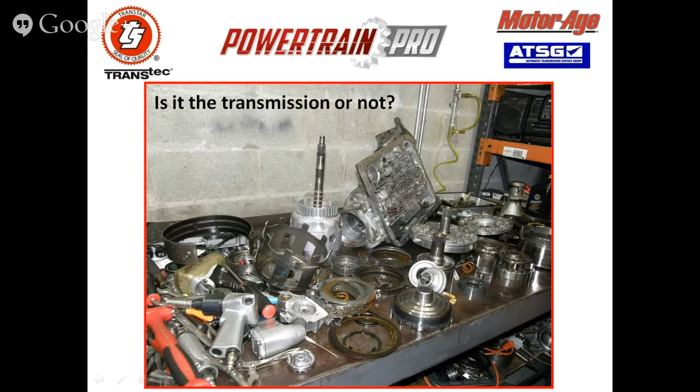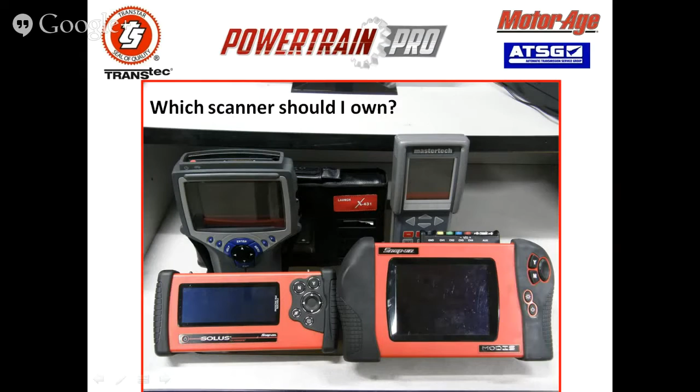One of the most widely asked questions I hear when it comes to transmission diagnostics is, is it the transmission or not? The second most widely asked question is, which scanner should I own? Neither of these simple questions have a short, simple answer. One response I have is that the question you should really be asking yourself is, what type of scope should you own? Because you will definitely nail down more issues with a scope than you will with a scan tool.

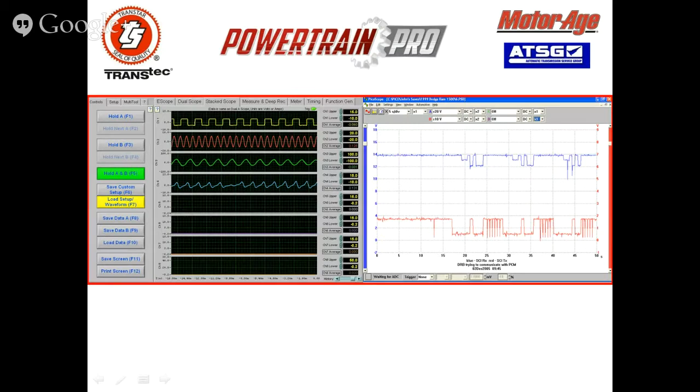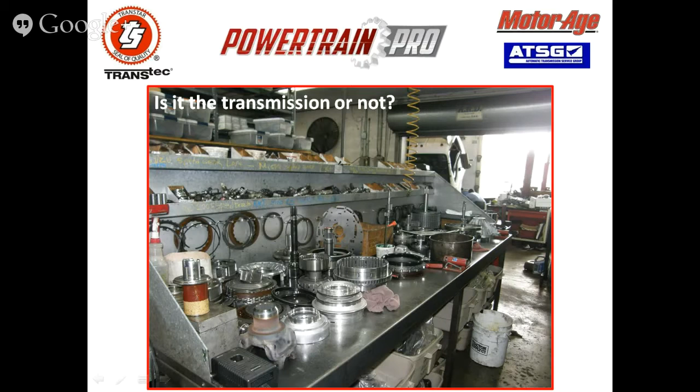But when a transmission is malfunctioning, a legitimate starting point is to ask, is it the transmission or not? After that, a diagnostic approach to a particular problem can vary depending on a number of factors.

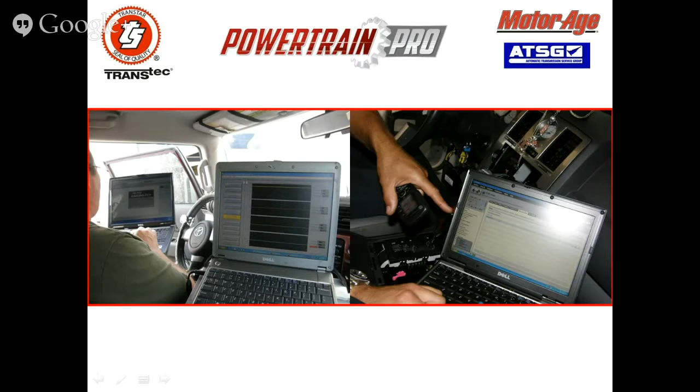Some of the major contributing factors that could shape a diagnostic approach would be the year and make of the vehicle, the level of expertise of the tech, and the type of equipment available for use. The year and make of the vehicle not only determines the type of transmission being diagnosed, but also determines the operating system of the vehicle it works within.

For example, is the ABS the primary source of vehicle speed being broadcasted over the network? Or is it a Hall effect or AC voltage generator located in the differential, the transfer case, or transmission? Does it have a mechanical TPS or drive-by-wire? Is there a dedicated TCM, or is it integrated into a PCM?

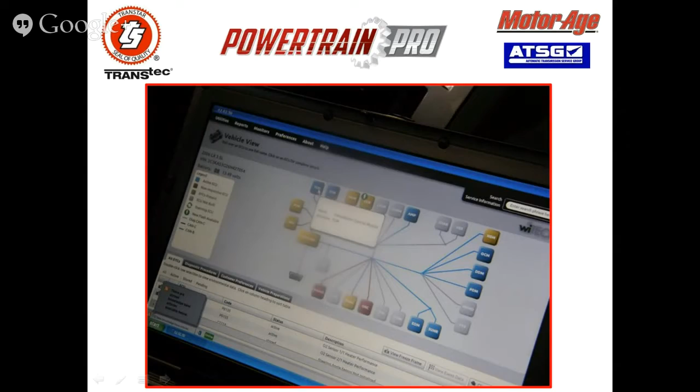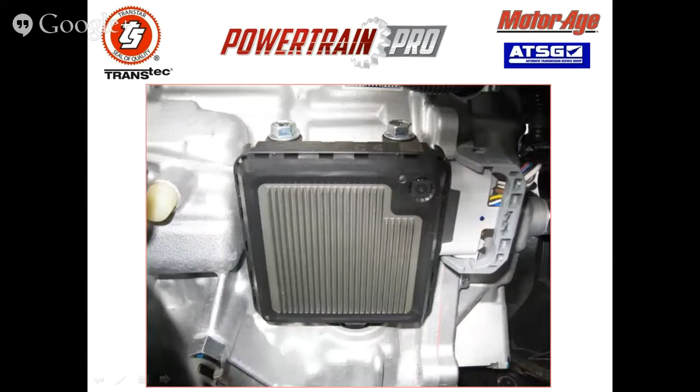The transmission itself could have the computer built into the transmission, like a mechatronic assembly or a TECM, or it could be bolted directly on the transmission, like the Toyota U660 or the Ford TF81SC, or it could be remotely located somewhere in the vehicle.

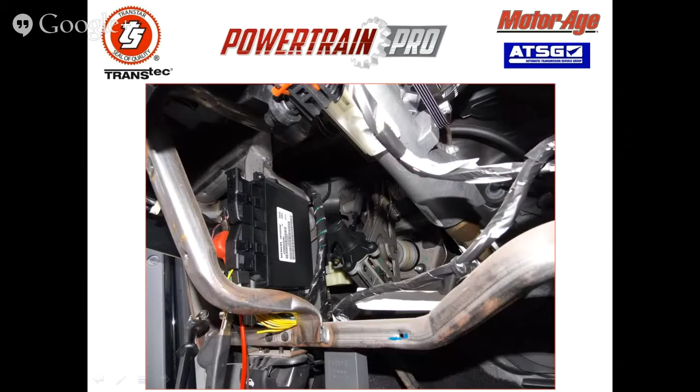Just this factor alone changes how one would approach a solenoid electrical fault. This was just a simple example of how a diagnostic approach can change based on the type of transmission and the operating system it works within. The various differences are considerable.

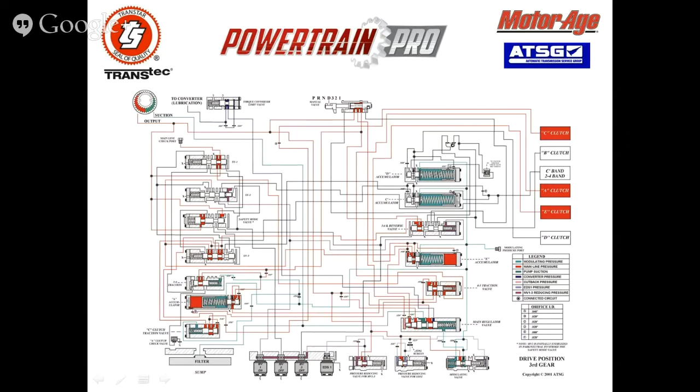But then there comes into play the level of expertise of the tech. Does he or she know how to read hydraulics and wiring diagrams? And can they interpret pressure gauge readings? I think if you can interpret this one, you're pretty good.

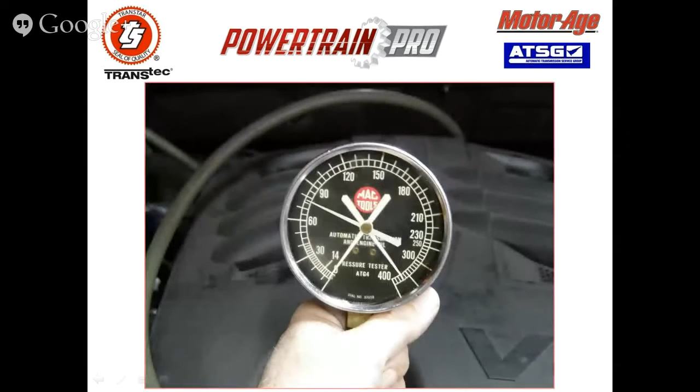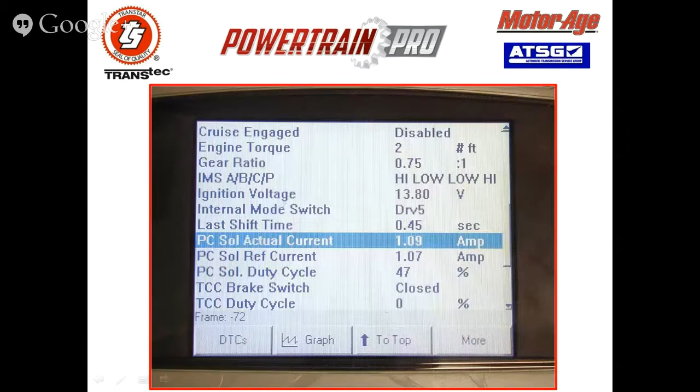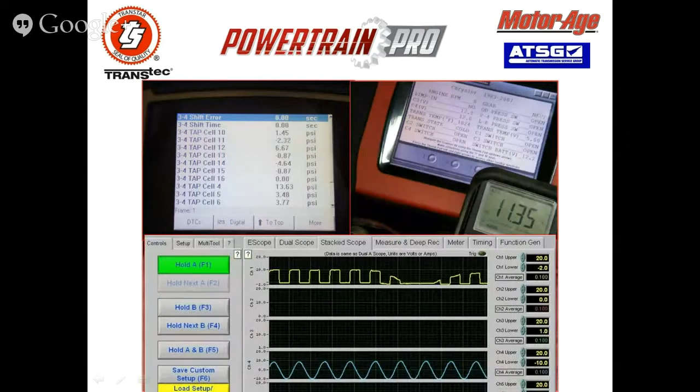Can they record movies with the scan tool perhaps, and then be able to interpret that scan tool data? Can the tech operate scopes and meters effectively? Is there a comprehensive understanding of various sensors, inputs, and computer command outputs? Is there a comprehensive understanding of solenoid to planetary power flow?

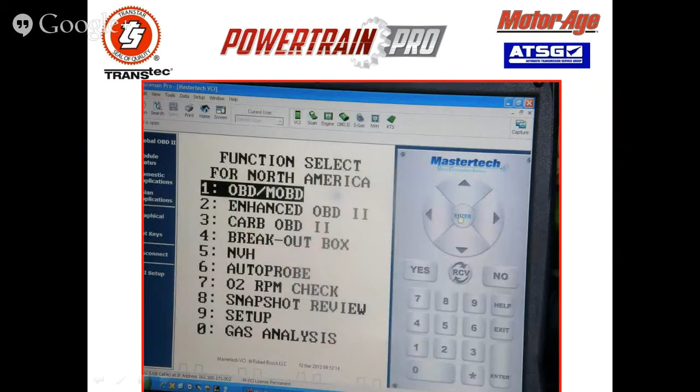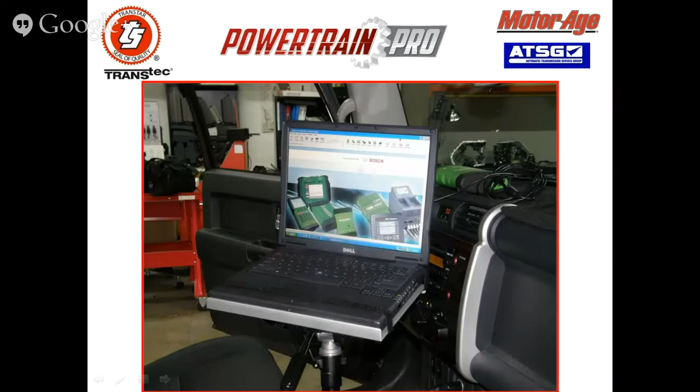The level of expertise of an individual determines the optimal use of the diagnostic equipment that's on hand in the shop. I've seen the extreme where a shop has a variety of scanners, meters, and scopes, and no one knows how to use them beyond pulling codes. Yet on the other hand, there is an extremely capable individual in the shop but lacks the equipment to do their best.

But with all this in mind, one can completely understand how difficult it is to answer, is it the transmission or not? However, in light of these variables, there are general tips in diagnosing problems that can be utilized in a wide variety of cases, which is the intent of this seminar.

These general tips that I'm going to offer up have been developed over the years from working on the technical helpline here at ATSG. These tips will cover the most common questions to ask the customer, to tips about trouble codes. We're going to have several points throughout the presentation about trouble codes.

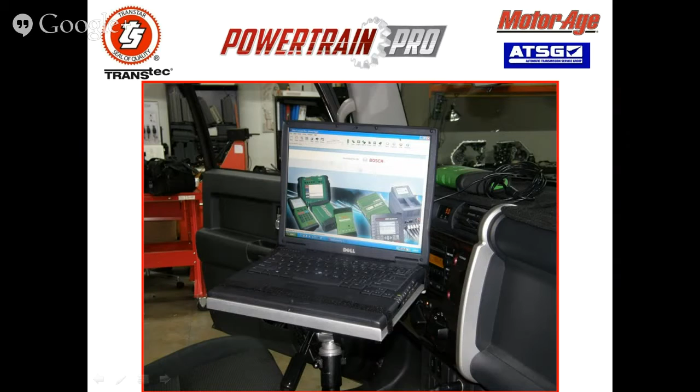The importance of power and grounds, obviously, wiring and electrical devices, and what to do with the lack of scan tool data. And then some sensor signal tips.

But first of all, we'll start by briefly running through a typical checklist so that it can be contrasted with what I call the not-the-typical checklist.

I cannot emphasize enough, from doing tech calls, the amount of headaches that can be avoided if the right questions were asked. The not-the-typical checklist was developed from experiences we've had with the tech line. Hindsight is always 20/20 vision, so the intent is to have foresight with this kind of list.

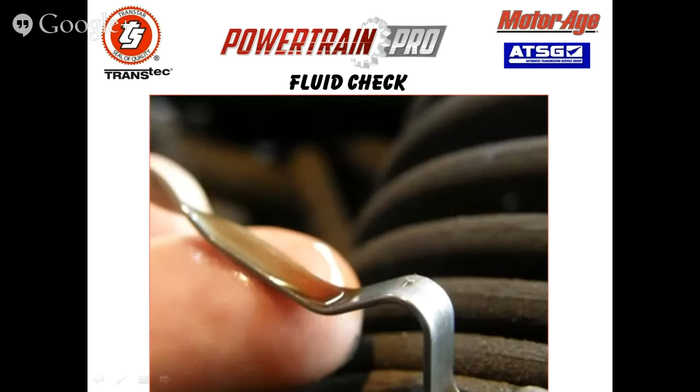A typical checklist usually begins with acquiring customer and vehicle information, and asking the driver what the complaint is, followed by when they began to notice the problem. Usually at this point, an inspection is made of the fluid level and its condition. Pulling codes may be next, and we'll get into codes a little later on.

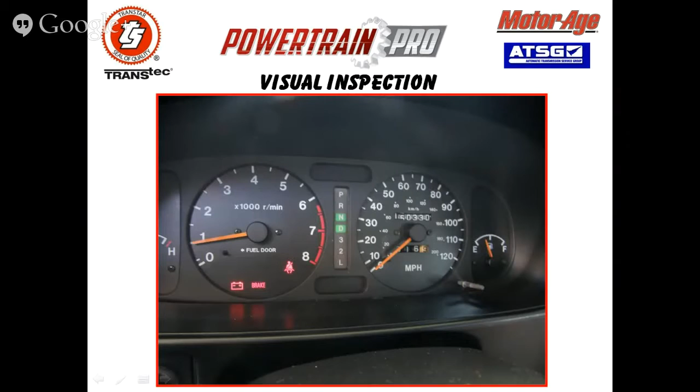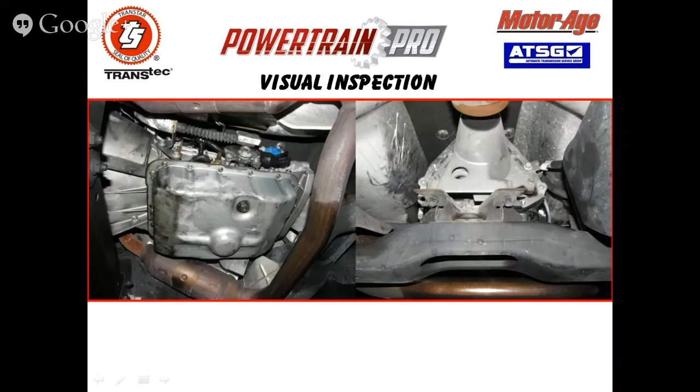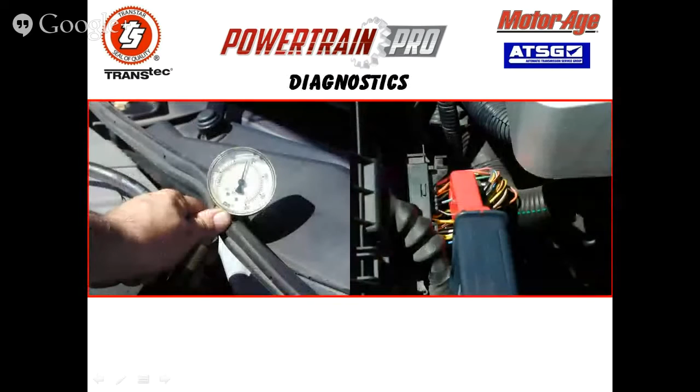And of course we check for leaks, bad mounts, U-joints. We might be looking for linkage issues. And after all this, there may still be a need to do some pressure testing, electrical testing, maybe even bulletin investigations before it can actually be determined if the transmission needs to come out or not.

But now let's run through the not-the-typical checklist, which I think is really going to be helpful if you don't already have some of these questions in mind.

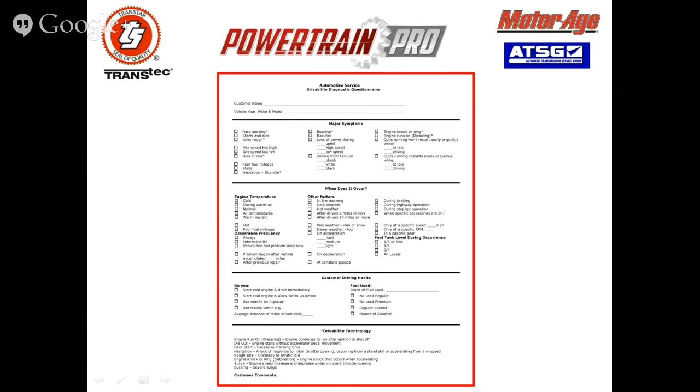The very first thing is to ask the customer if the vehicle has had an aftermarket tuning program or chip installed into the computer, or if it had recent programming done at the dealer.

We had, for example, a shop out in Everson, Washington, where a Dodge diesel with an incomplete chassis using the Aisin-Seiki 68RC transmission came into the shop. It was totally destroyed. After rebuilding, the transmission had sloppy shifts.

And of course the tech tried to have a factory scan tool reset the shift adapts, but they would not reset - they were frozen. He was about ready to buy a new TCM.

But when he called the owner to discuss the possibility of a new computer, all of a sudden the owner started to say, you know, I installed this tuner program into the computer through the ALDL, and after I did it, it shifted great, but over time it really disintegrated. Well, so did the transmission.

But the tool used to install the tuner could also remove the program. And when they did, the adapts could be reset, and the transmission shifted perfectly.

Now, could you imagine the shop owner buying a new TCM? Of course everything would work well. And what do you think the owner would do once he got his truck back? Install the tuner back into the computer, which would lock the adapts and burn the transmission out while it was under warranty.

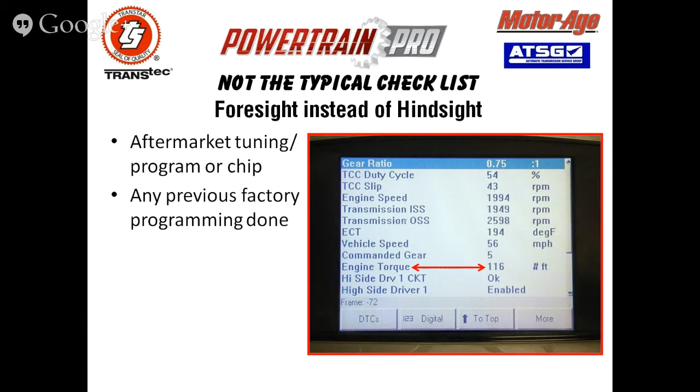Now, one tip to see if any alterations were made to engine performance would be to compare the engine torque PID in a scan tool, like you see here, to factory specifications. Because engine torque is a combination - it's an engine load calculation based on TPS and mass airflow. It's great for identifying non-OE calibrations.

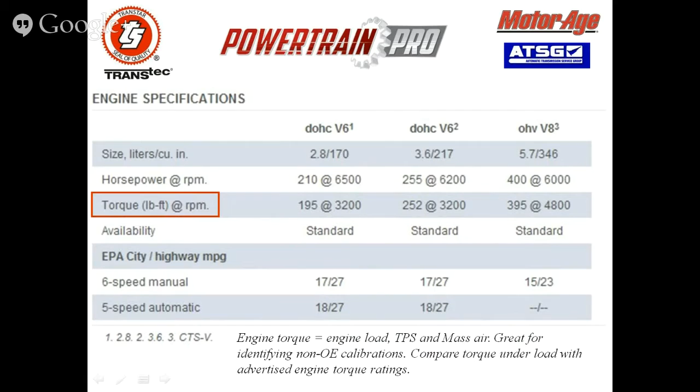If you compare the torque under load with advertised engine torque ratings, and if they don't match, well, either there might have been some programming done, or maybe you do have some engine load problems. So at least you have a clue that something is wrong.

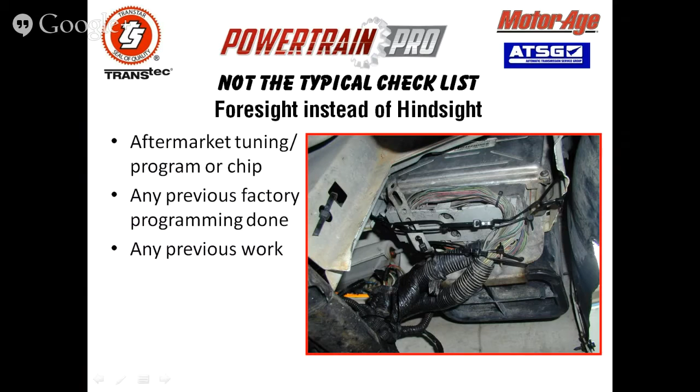Another question to ask, of course, is whether any previous work was done on the vehicle, and I mean any kind of work, not just transmission. Maybe engine, under the hood stuff, brakes, ABS, but especially collision repair. There are so many times we've had work done in a collision shop that has hidden problems with electrical wiring. So if you have a clue as to where the work was performed, you could get pointed in the right direction. Now, here's something that's very good to do.

Always check tire sizes. Make sure you have correct tire size, and I suggest using a stagger gauge. It's so quick and easy to do, and you can ensure that all the tires are of equal size within 1/8 inch of each other, especially with 4x4s and all-wheel drives. When you have the wrong tire size, that transfer case becomes overactive, and you have premature failure of the transfer case.

We have quite a number of vehicles now that have that curve recognition program where, once you're in a turn, it does not want the transmission to shift. So if you've got tires that are overinflated, underinflated, maybe 3 worn tires and 1 good spare, the computer will initiate a curve recognition program as you're going down the road straight, and the heavier you are in the throttle, the less it will upshift. So really, tire sizes are critical.

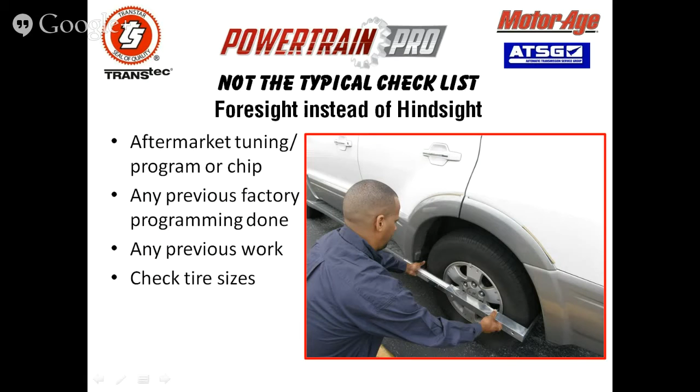And now, of course, you should also ask the customer, was it in a flood? I know that sounds kind of ridiculous, but keep in mind, customers do not like telling you the whole story in fear of a higher repair bill. So you really got to try to work these things out of them.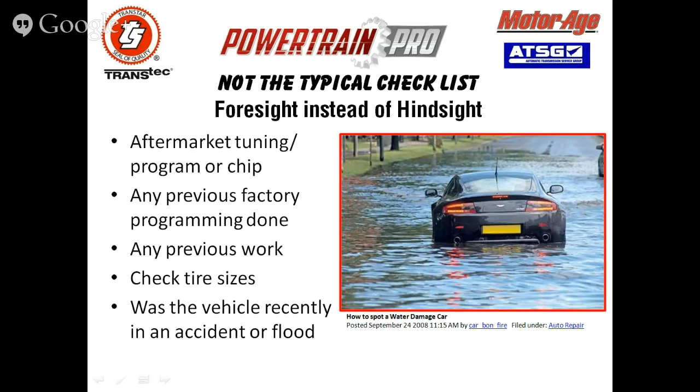Also ask if there was any aftermarket gadgets recently added, especially because they could have done something that's completely hidden and out of view. And again, these are questions that, had shops known this before doing the work, could have saved them enormous amounts of headaches.

Fluid changes, additives, gasoline, just so many things. Like Honda, you've got to make sure you got OEM Honda fluid in that thing. Otherwise, Hondas are going to have very abrupt shifts.

Engine oil—take a 2.4 liter Chevy Cobalt with variable valve timing. It'll sport a P0010 code or a P0011 code for a camshaft position actuator solenoid system performance. And these codes will absolutely cause high line pressure, making harsh shifts inside the transmission.

I had a situation here in Miami at Alonzo Transmission where it was a BMW 7 Series. The vehicle came in, had to have some repairs done, and then they were calling us here at ATSG with a severe problem with the converter clutch. At least that's what they thought. It was so severe that it actually felt like somebody was inside that transmission with a sledgehammer beating it up against the flywheel.

And of course, I went there, and I got to tell you, it was remarkable. While idling in park, the banging that was going on was so dramatic that the steering wheel was actually vibrating. What it turned out to be was that when the car came to the shop, it came basically almost in fumes. So on a road test, they had to put gas in it, and they loaded it up with some cheap gas. That BMW 7 Series did not like it, and they were confused, thinking it was some kind of converter clutch issue.

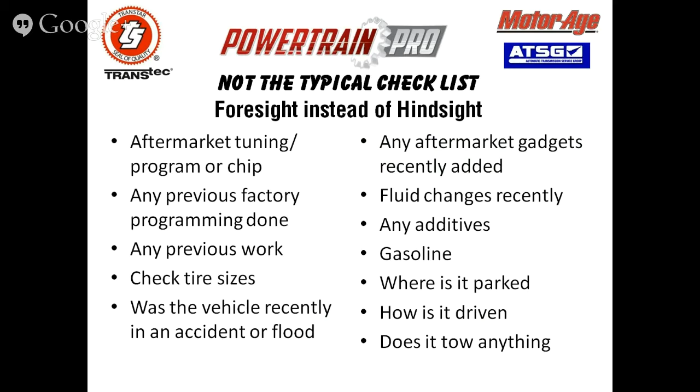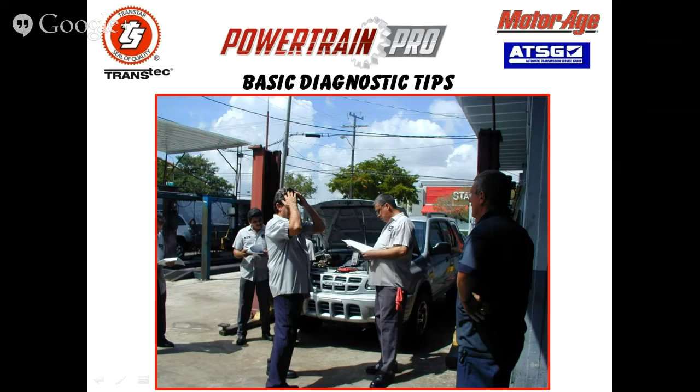So sometimes asking these questions can really pull out some answers that you might need to diagnose some of these problems. Oftentimes answers to these questions take place after the work has been completed and the real problem surfaces. So remember, hindsight is 20/20 - make it your foresight with some of these questions.

Now we talked about pulling codes earlier. By the way, you'll see a lot of pictures using the Genesis throughout this PowerPoint, and the reason for that is it's such an easy scan tool to take a picture of - the screen is big and it really helps with the presentation. So that's why you'll see that here.

But anyway, whether or not you're pulling codes, I do recommend you do a complete system health check and scan the entire system for codes. And the next step is to prioritize your codes - I call that learning how to diagnose your diagnostic codes.

I'm going to have a simple example right at the end of this presentation about that. I could probably do a whole webinar on diagnosing diagnostic codes and learning how to put them in priority - trying to see how one code may be caused by another, or how maybe there's something wrong with the transmission that caused those codes, which I'll explain shortly.

And of course it's good to write down all the codes to document them - I personally like to do that - and then erase them all, and drive the vehicle to see which ones return immediately. That helps me begin to prioritize what's going on with the vehicle.

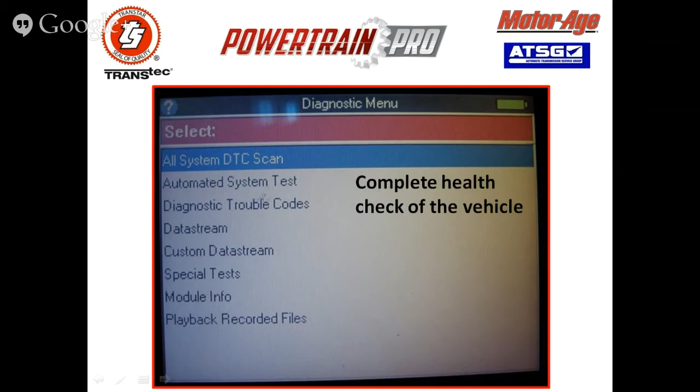Now this next point I just can't stress enough either. Battery testing only takes minutes to do, just like it would only take minutes for you to take a stagger gauge and measure tire sizes. To actually clean the battery and do a load test on it - you won't believe how many problems you will solve just by starting here with the battery.

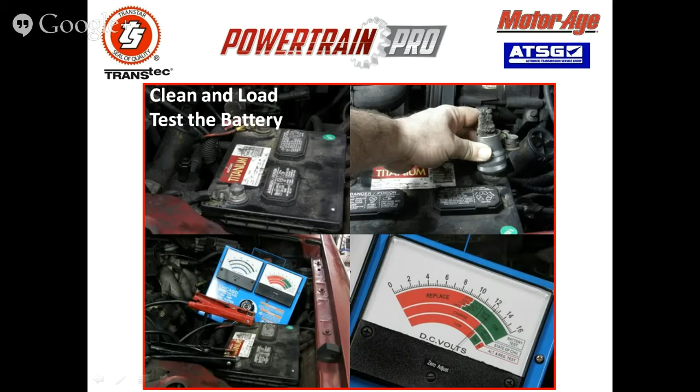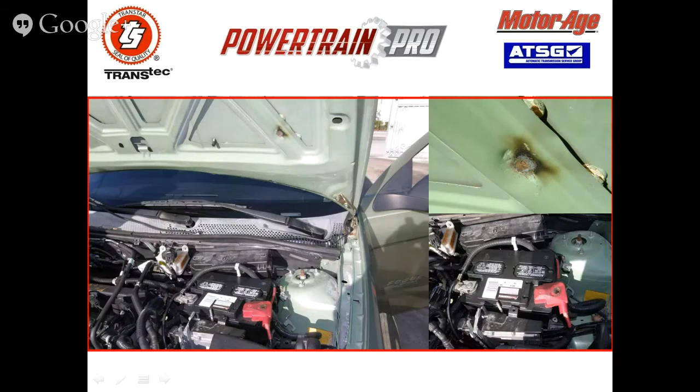But there are vehicles now that, because there's so many modules, batteries are important. There are even some vehicles using power modules to control optimized charging, the reduction of load or load deactivation, to name a few things they can do. They have fail-safe characteristics and data memory. So when a battery is replaced, the module will need to be informed that it has been.

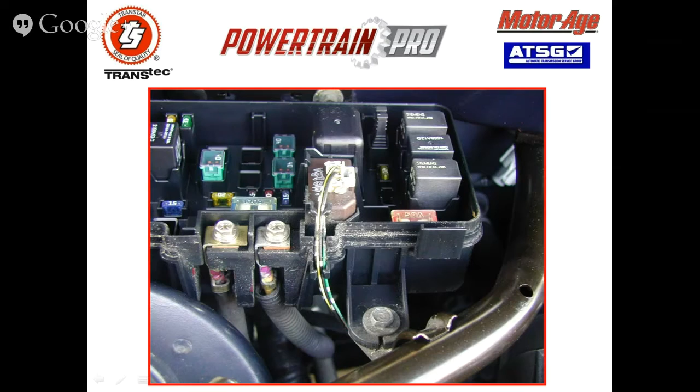Now another example of controlling the power in the system and how it can affect particularly transmission diagnostics: Honda with the electronic load detector, the ELD. When this thing goes bad - it obviously helps control voltage output on demand - you will get a host of solenoid electrical codes, and you'll never resolve them until you get that ELD squared away. So that's an example of trying to diagnose your diagnostic codes and putting codes in certain priorities. Don't ignore the ELD and try to fix all these solenoid electrical codes - get the ELD fixed first, get the electrical right, and then let's see if we've still got solenoid electrical codes.

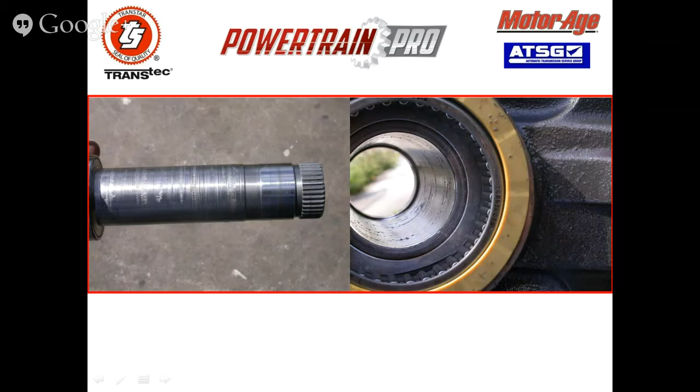It will try to find a ground path through different parts of the transmission. You can have these bushings that look like moon craters, little pockets of explosion, taking out different parts of the transmission because it's looking for a ground path.

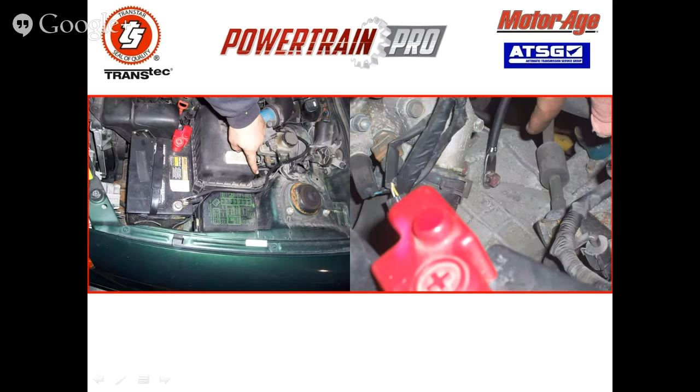Here's a scenario where this is like an Asian style setup where all the solenoids are grounded in the transmission through an eyelet and a bolt. So the computer is just hammering it with voltage, firing the solenoids with voltage. And the ground path from the transmission to the battery was compromised and continued to produce solenoid electrical codes. No matter what you did, we couldn't fix it. We actually ran a ground wire from the negative post of the battery right to the bell housing bolt to the transmission to ensure that we had a good ground, and all the solenoid codes went away.

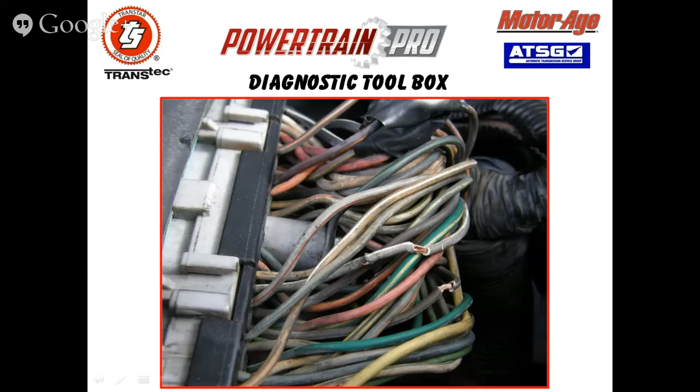So we can't underestimate power and grounds, batteries. Make sure we have the right battery. Just don't want to underestimate that. You know, much can be said by doing a cursory view of the electrical system.

So doing some inspections like this, when you have a lot of electrical codes, it's good to be aware that insulation does disintegrate, and to be doing that kind of visual inspection. Sometimes doing a visual inspection becomes quite obvious. You see something like this, you know why you've got some electrical problem.

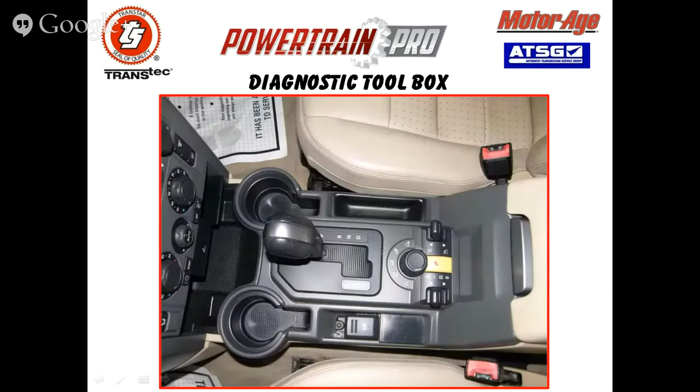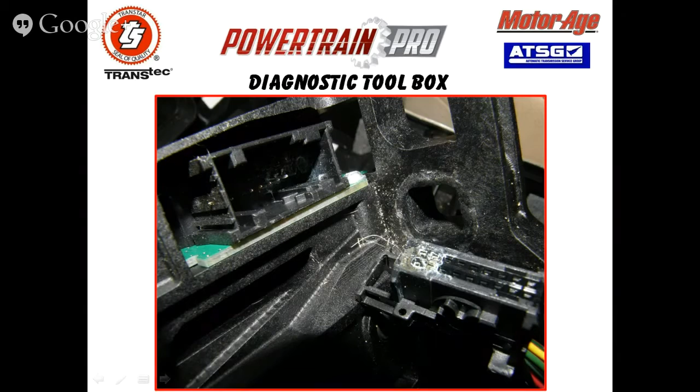Now, another area that you want to watch for are these center consoles. Center console with the shifters, a lot of them have little shifter computers in there. And of course, you've got sunroofs, coffee spills, soda spills. You've got all kinds of areas in which you can get water down in there and give us all kinds of problems, and you get water intrusion. I call it a little bit of broccoli growth going on in the connector, and gives you different things, and you got to be looking for things like this and keep that in mind.

Of course, some self-inflicted injuries, like laying down a pin, and you want to be looking for those things. Sometimes I hear, we didn't have this problem when it came in, and now all of a sudden we got all these electrical problems.

Well, you know, I've been in the shop since 1974. I've been really in the shop almost full time, and I've seen some pretty wild things in the transmission shop.

Sometimes the guy who's letting the transmission down on the jack starts talking to somebody next to him, or he's just looking away while the transmission's coming down, and all of a sudden I see the transmission start to lift up off the jack as it's being snagged on the wiring harness, and all of a sudden you're yanking wires.

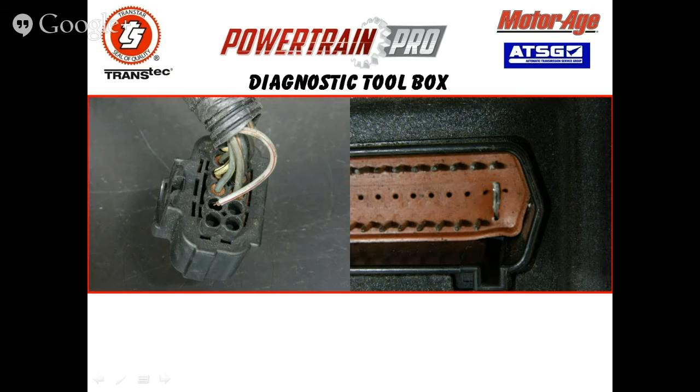So doing some visual inspection, looking for pins laying down, looking for wires that are broken in back of the connector. Very good to do things like that.

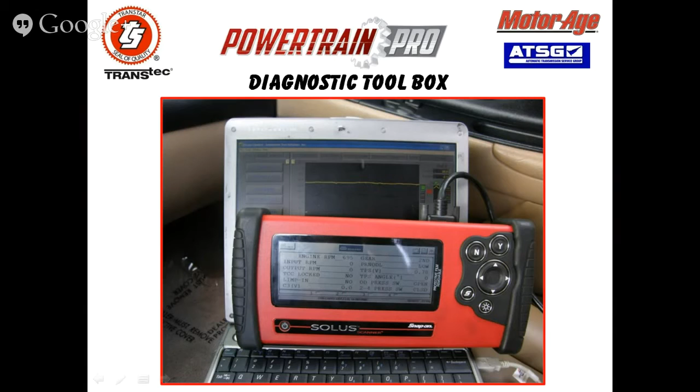Now, many times, getting into another tip here, aftermarket scan tools sometimes are very lacking for transmission diagnostics. And the transmission industry has always been the red-haired stepchild in this way. One of the main reasons is that scan tools cater to emissions control, especially when you've got 10,000 transmission shops and shrinking, while you have 110,000 general repair shops and growing. It's an obvious choice as to the type of data the scan tool companies want to load up the tool with.

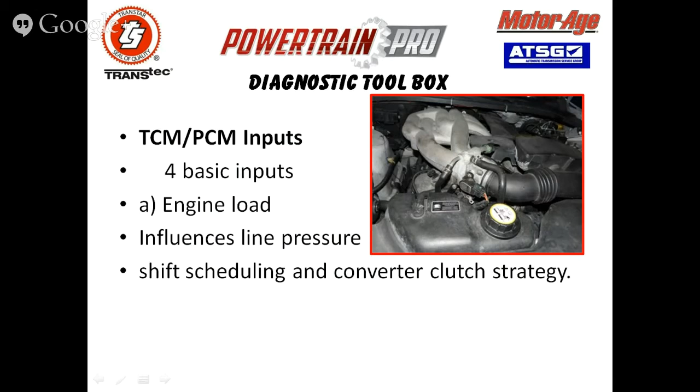But in these cases, when I'm diagnosing transmission issues with a scan tool that is not offering much in transmission data, I observe 4 main inputs, which typically can be found fairly consistently in scan tools. The first one, of course, is engine load. We're talking TPS, mass air, anything related to engine load, because it influences line pressure, shift scheduling, converter clutch strategy. So that's one thing I'm concentrating on. The next thing is speed sensors.

Obviously, speed sensors of any sort, whether it's engine speed sensors, input shaft speed sensors, or output shaft speed sensors, I'll take whatever's available. Because speed sensors have a tremendous effect on shift scheduling and converter clutch control, but they can also be used to check gear ratio of the transmission, which helps with shift overlap, where we're releasing one clutch and putting on another, and that timing has to be right. Gear ratios are all determined by speed sensors, a very important input.

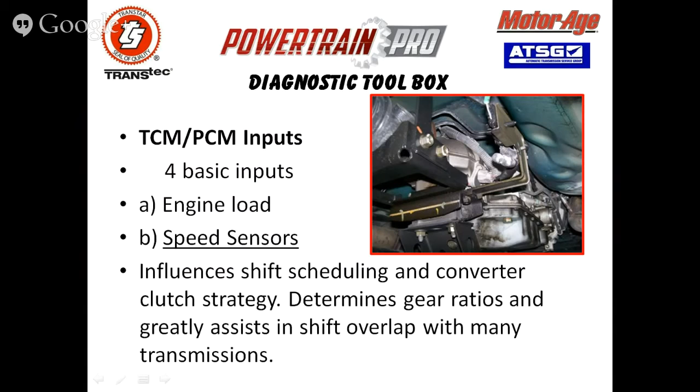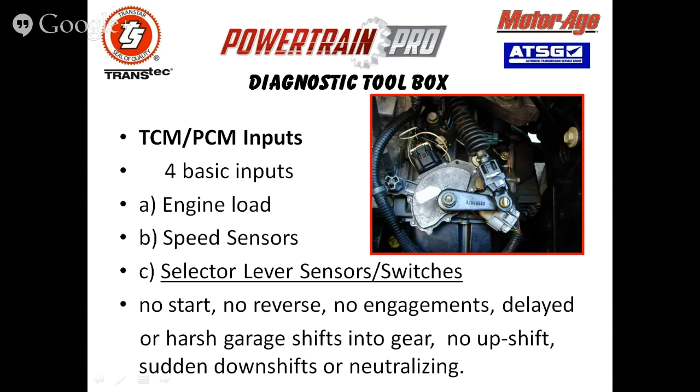The third input that I'm concerned about is selector lever sensors or switches. We can have all kinds of issues: no start, no reverse, no engagement, delayed or harsh garage shifts in gear, no upshifts, sudden downshifts, or neutralizing. I've even seen where the malfunction indicating light will come on, maybe even be blinking away, and you hook up a scan tool and there's no codes. I've seen that many times be selector lever sensors or switches. So that's my third main input that I'm concerned about.

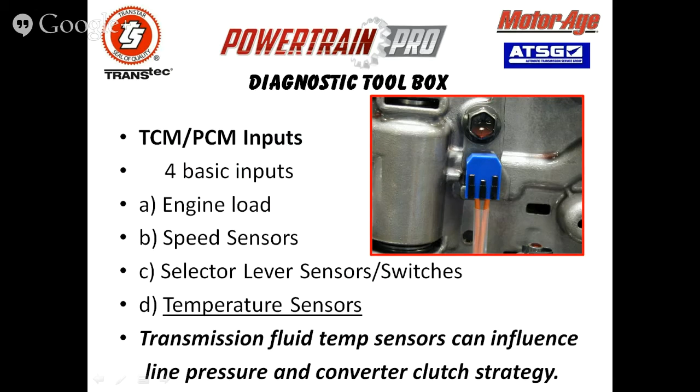The last one is temperature sensors, whether they're transmission fluid temperature sensors or engine coolant temperature sensors. Transmission fluid temperature sensors can influence line pressure and converter clutch strategy. Engine coolant temperature can influence shift scheduling and converter clutch strategy as well. If these sensors malfunction, we could expect complaints of late shifts, flared shifts, loss of high gears, and/or cycling in and out of the converter, or no converter clutch at all.

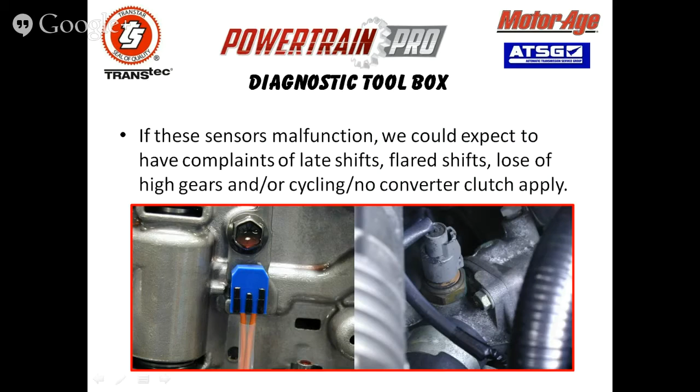Now this next point is another critical point to keep in mind when you're diagnosing, and that is: how are sensor signals generated? This is a very critical point, because just because you have a sensor or signal that's malfunctioning does not necessarily mean the sensor, the wiring, or the computer is bad. It could be the way in which the signal is produced. I'll give you a really good example.

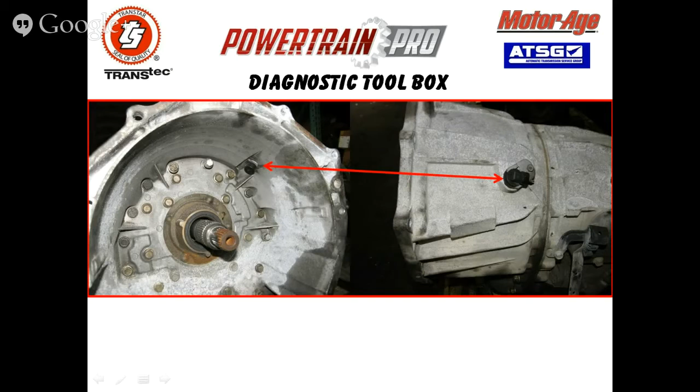The Allison 1000, 2000, prior to Generation 4, has an engine RPM sensor in the converter housing. The sensor is actually reading what they call dimples on the torque converter. I call them hash marks, because I think dimples go in and hash marks go out. But anyway, call them what you will, dimples or hash marks, the thing is these converters get bounced around.

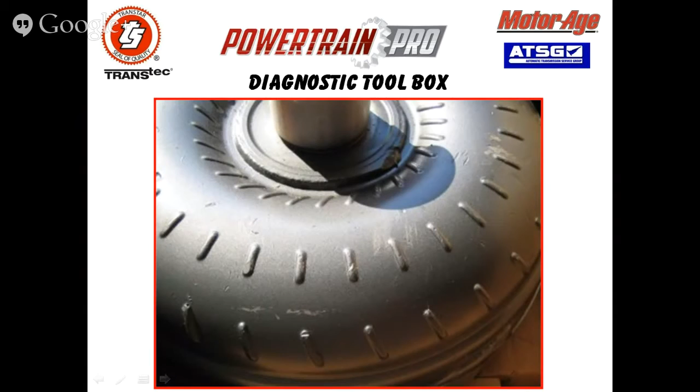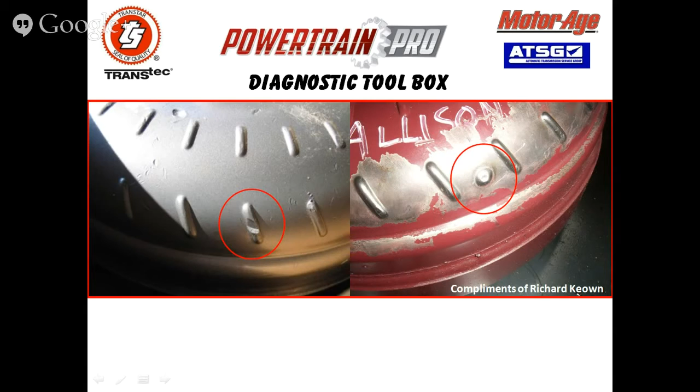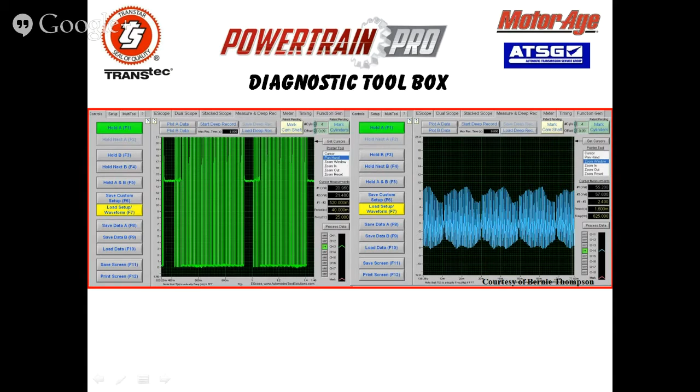Here's another example with a Ford FNR5 transmission. As we're looking down through the vehicle speed sensor hole at the exciter wheel that's used to excite the speed sensor, you can see the tabs. Now those tabs, when you've got that unit out on the bench, can bend down real easy, and now you've got yourself an air gap issue, and you're going to have the same kind of problem — a miss in that signal because of that air gap. Of course, depending on how many of those tabs got bent down, that could determine the kind of problem you might see with the scope.

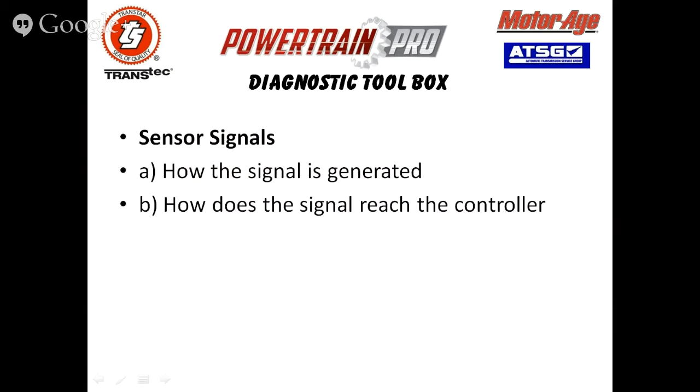It's always good to remember how a signal is generated. But the next part that's critical in diagnosing is how does the signal finally reach the controlling computer, the one that's actually making the transmission function. How does that signal actually get there?

Here, for example, is a 722.6 transmission in Mercedes, or they call it the NAG-1 in Jeep, Dodge and Chrysler vehicles - Dodge Sprinters, Chrysler 300, and all kinds of vehicles. This transmission does not have a vehicle speed sensor in it at all. It's through the ABS, actually. The ABS is what actually calculates vehicle speed, which is then broadcasted over the network to the TCM.

This is interesting because that means the computer is calculating gear ratio based on the input shaft speed sensor that it has. It does have an input shaft speed sensor, but then it calculates gear ratio based on what it sees via vehicle speed. So that means it's coming from the ABS over the network.

We've had scenarios where people have changed the rear differential and put the wrong ratio in. The computer doesn't know that, so the ABS doesn't know that. Next thing you know, we're getting constant transmission gear ratio error codes because of the wrong differential in the back. When you understand how a system works and how a signal eventually gets to the controlling computer, there's a lot more you can take into your diagnostics.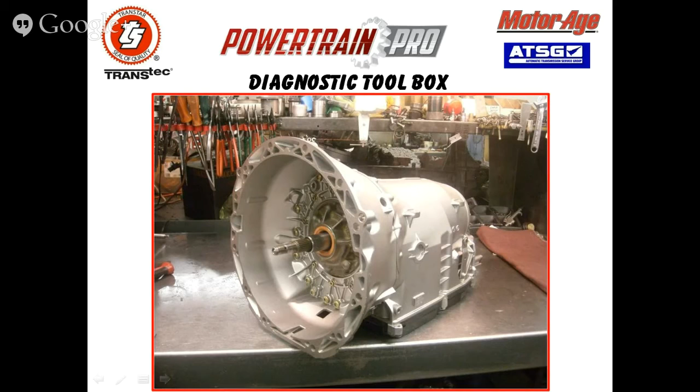The instrument cluster then sends the signal to the computer. So now all of a sudden the computer's giving you a vehicle speed signal code, something wrong with the VSS, and you're playing around with the VSS and everything else. Meanwhile, you've got a bad instrument cluster. So again, not only do you want to know how a signal is generated, but how does it finally get that signal to the computer that's controlling the transmission.

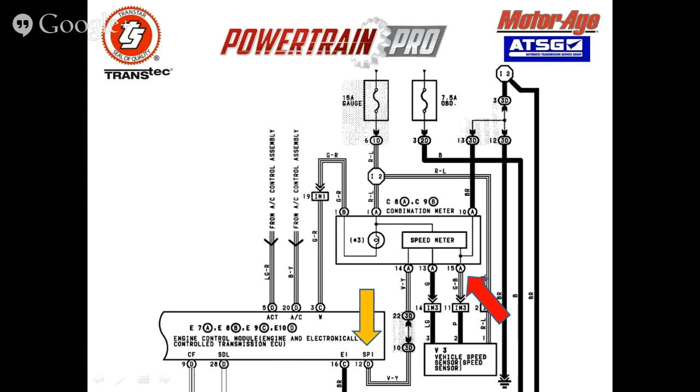The next thing is code classifications. I wanted to talk a little bit about code classifications, and this is kind of helpful in helping you to prioritize codes.

I use electrical, which means just that - it's not the transmission, meaning internal like clutches or anything like that. If it's a bad solenoid internally or internal wiring internally, yes, but it's anything related from the solenoid to the computer, or the computer itself, or the battery, things like that - it's strictly electrical. P0750, for example, with Dodge and Chrysler, very common, low reverse lockup solenoid code. Typically it's a bad computer, but we've had bad wiring too. The point is to recognize that when you've got an electrical code, the first thing you should think of is: do I have battery issues? Right away, battery issues, ground issues, and then do I have wiring problems, solenoid problems, things like that.

Range codes - I use P1120, the Ford code for TPS, and the reason I bring that up is, let's just say you have a TPS with a range code problem, meaning it's out of range. Well, that doesn't necessarily mean the TPS is bad. If the ground side of the TPS is compromised, you're going to be out of range on the voltage side, the signal side. So when you understand range, you're also going to understand how that signal is being produced, and what could affect the actual signal itself.

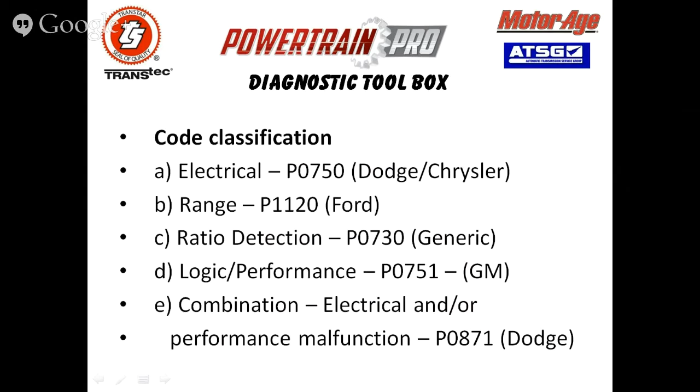Again, the idea is to learn how to put codes in their classification, and then understand how to diagnose these codes by understanding how a signal is being generated, how it's finally making it into the computer, things like that. Now here's a simple example of what I was talking about.

Take a Ford 5R55S and W. We got a P1715, a performance code for shift solenoid B, and we got P0733, a gear ratio error in third.

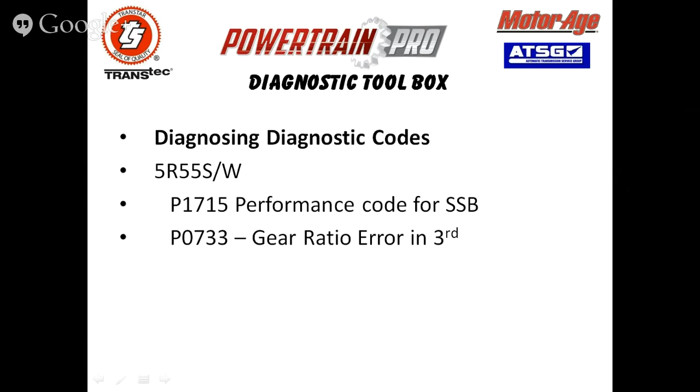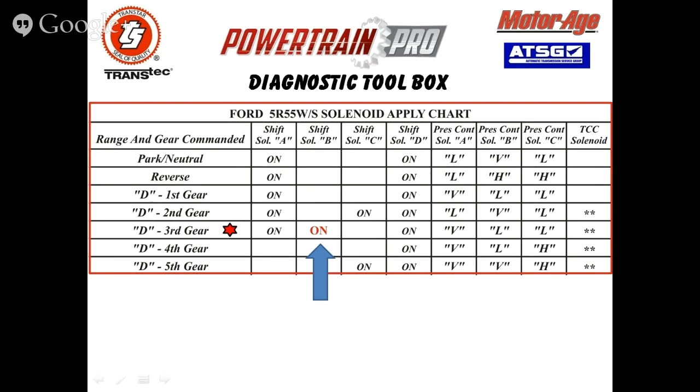Well, why don't we take a look at shift solenoid B, the application chart, and we'll look and we'll notice that shift solenoid B is only used to make third gear. Well, that's interesting. We have P0733, gear ratio error. Well, let's see what's going on in third gear.

The next thing to do is look at a component application chart, and lo and behold, you find that you've got the intermediate band being used for third gear. So now you got one solenoid, one gear, the intermediate band. It's not coming on. For some reason, the intermediate band is not working.

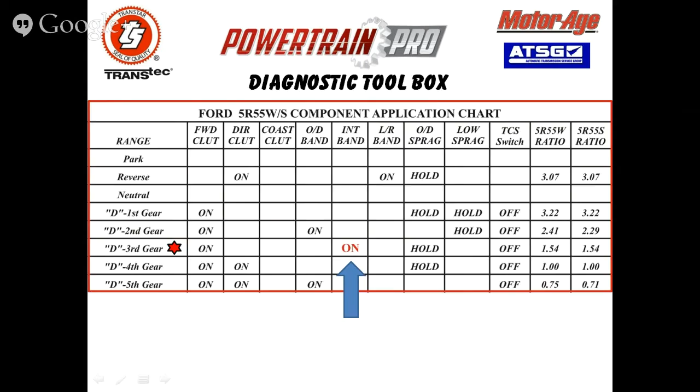So before I think that I have a solenoid problem, or before I think I may have an internal transmission problem, I'm going to go to the intermediate servo to see if there's something wrong with the servo, which is external. So based on those codes, a simple example, but learning how to diagnose your diagnostic code and understanding how the system works, and to be able to make a reasonable diagnosis.

Now, last but not least, I would like to talk about some self-inflicted injuries, transmission misapplications. Obviously, putting the wrong transmission in can give you gear ratio errors. We talked about that a little bit already.

But, you know, there have been some transmissions that actually had AC pulse generator speed sensors that switched over to Hall effect sensors, and yet the connector, the case connector, is the same. You could pull one transmission out, put another one in. Next thing you know, it aborts immediately because of speed sensor issues.

And we've had differences in transmission fluid temperature, changing the way it would operate from one year to the next. So you switch them out, and next thing you know, you got TFT issues, converter clutch apply issues, things like that. Now, we've already discussed programming issues, fluids, compromised connectors, pinch wiring.

Some of the things I want to say about compromised connectors and pinch wiring, sometimes what happens, as I see, is that the weather pack seal around the connector maybe has gotten some fluid on it or some battery acid on it. You unplug it, next thing you know, the thing just balloons out, and now you can't plug the connector back in.

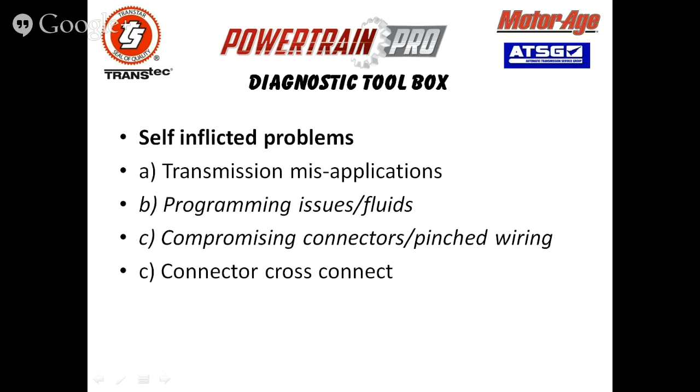But then there's connector cross-connects, and I always try to make known in newsletters and bulletins and articles about all the various ones we run into. There's tons of connector cross-connects that just beat everyone up, and it's never in your thinking, in your diagnostics. I just thought, you know, some of the popular ones that we see are speed sensors and solenoids.

So those are the two most popular. I earlier talked about the Aisin Seiki AS68RC. There's a cross-connect that can happen with that one between the solenoid connector and the transmission range sensor connector. They're right next to each other, identical, and you can cross-connect them. But the most common ones are either speed sensors or solenoid.

When you cross-connect speed sensors, here's one of the ways that you can identify this. Typically, you have no reverse from park, but you have reverse from drive. And that's because when you're in park, you've got maybe an output and input speed sensor cross-connected, as soon as you start it up, the output is spinning. And the computer is thinking you're moving forward.

There's a safety feature that after so many miles per hour forward, if you go to reverse, it won't let reverse engage. But as soon as you go to drive and your foot's on the brake, everything comes to a stop. And now when you go from drive back to reverse, you'll have reverse. That's a telltale sign that you got your speed sensors crossed.

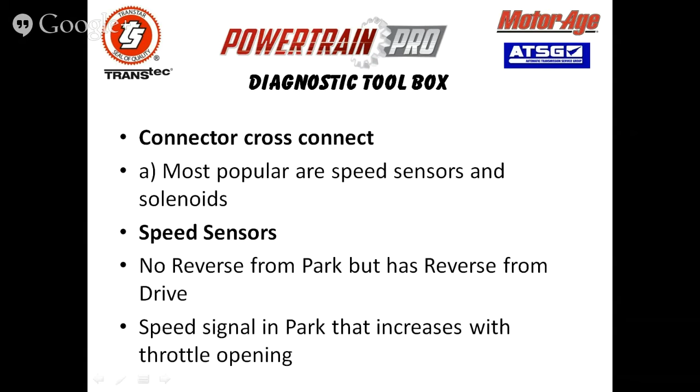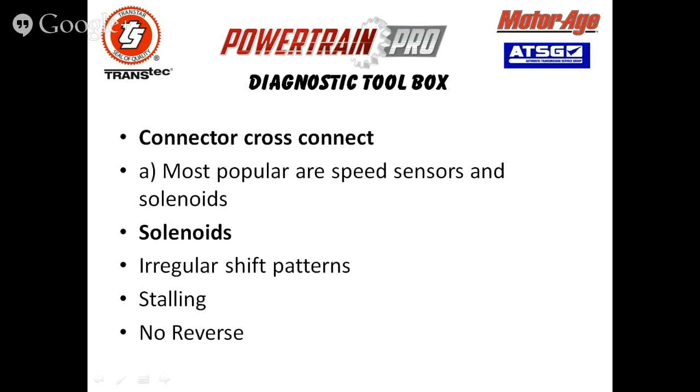You also may notice that you'll see a speed signal on the instrument cluster that increases with throttle opening. The other is solenoids. And when you cross-connect those, sometimes you have irregular shift patterns, you have stalling, you have a no reverse condition.

So in summary, some of the things to remember is to ask those unusual questions. Make sure you ask them. The customers do not want to give you the answer. They're afraid of that big bill, but you got to work it out of them, and do a complete health check of the computer system, and learn how to diagnose diagnostic codes, and make sure you test the batteries.

Again, power and grounds and the state of the battery charge and being able to handle load is critical. Checking tire sizes is critical. Stay mindful of those center consoles, and keep in mind those 4 main inputs if you have scan tool data that's lacking. Remember engine load, remember vehicle speed, remember transmission range sensors and temperature sensors.

And then, of course, using the code classification technique to help you in your code prioritizing and diagnosing codes.